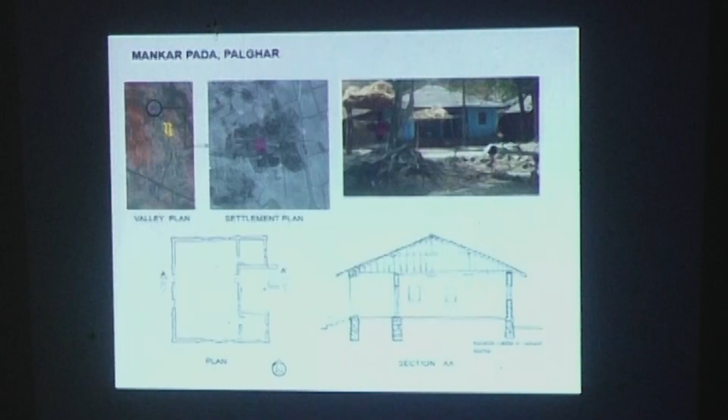This is about buildings in Palghar, northwest of Mumbai, Maharashtra, and this is a tribal area, and the building is reflecting a tribal planning template, also in the materials and the techniques.

This is a farmhouse. Started off as a weekend home, then became a full-fledged commercial property, and is very successful at that right now. This is southeast of Maharashtra, up on the Sahyadri range.

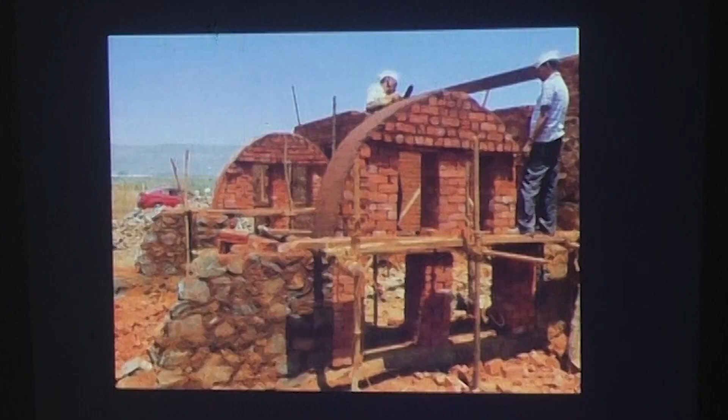And these are some methods, some techniques we use, which I will speak about later.

This shows my engagement with students at this same site, same previous site, at this location.

This shows that one of the things which I do is get students to work on sites on real projects, for them to be able to understand the field better and to consider designing with more practical concerns.

These are some workshops done with students. Speaking about this, all these visuals are about the arch.

This is back to the project, the same project, and another one in Karjat nearby. I'm sorry, I'm so sorry. So,

Yes, since they are a type, this is again a weekend home, so I was rushing through it. This is a house in Karjat. You can see some difference in the typology, at least technologically, where this does not really carry the Laurie Baker template of construction techniques.

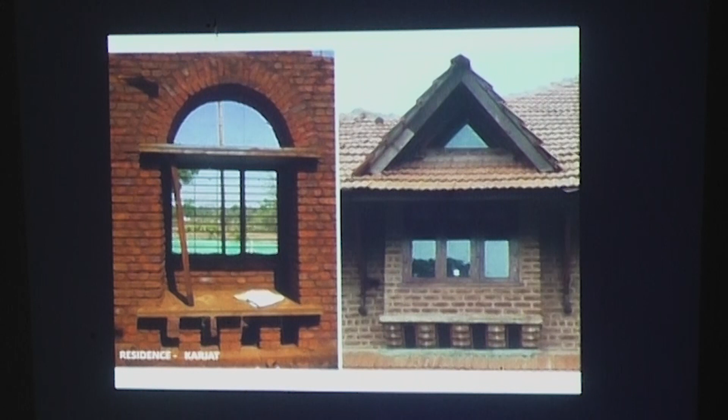That's why you can see it exposed, and you will see it's all in mud mortar. The whole building, the last three buildings, are completely done without any cement or steel in the superstructure.

This is another house in Khopoli, and the same template: farmhouse, no cement, no steel, using local techniques and materials, of course having their own slight variations based on the users.

And here's another type. Once again, coming to farmers, so you have seen a range between farmhouses and farmers' houses, right? There's a community house of farmers.

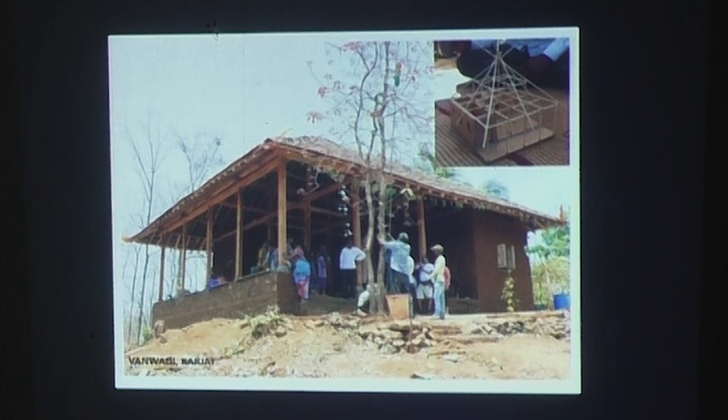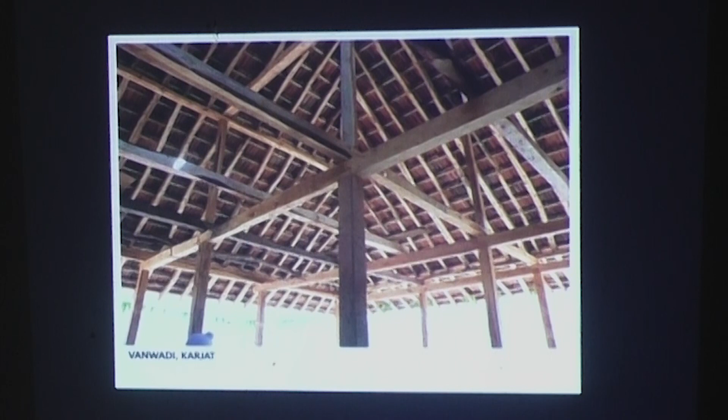It was done collaboratively, where people from various parts of the world had also come to learn the techniques while it was being built, and contributing to it. And then there were a lot of experiments, but systemically, it was taken from the immediate tribal template of planning and technique.

Now I will speak of how we do what we do, and why.

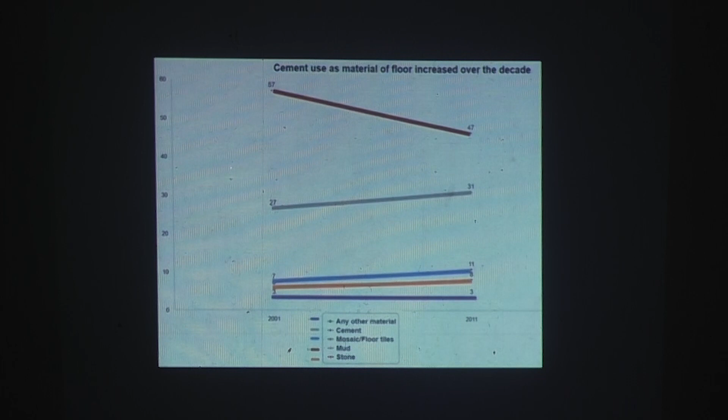This is a statistic for floor materials, how they have performed over 10 years, or how they are being used. You can clearly see that mud goes down, and cement goes up. Your mosaic floors go up. Even if only slightly, stone goes up. We will talk about what these mean in terms of ecology, embodied energy, etc. These are graphs to contextualize the discussion.

Look at this, the major component is burnt bricks. Even today, with all this madness about development and technology, we still have a big percentage building in mud or mud unburnt bricks. These two show a very interesting jump. How does this jump happen, and why does it happen? These are questions which bother me.

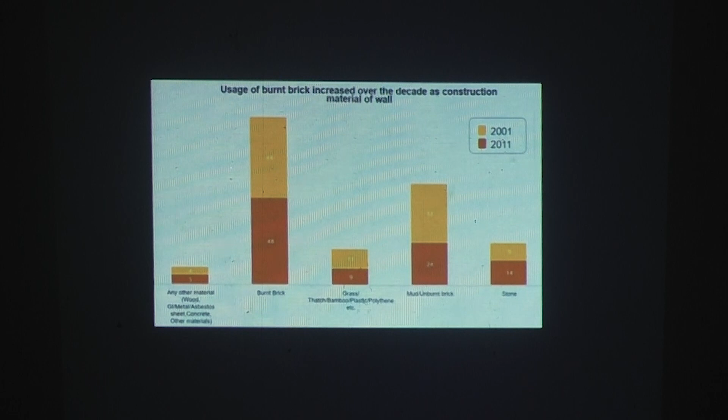Because when you're quarrying, you're turning the biological succession upside down. It has taken millions of years to form that rock, but a few thousand years for lichen to work on it and create some kind of soil, on which it's taken a few hundred years to form herbaceous growth, then some small flora, and then trees coming out of it. You're turning the entire biological succession on its head, and this process is only increasing. Leave apart what you don't know what to do with those quarries, and there are all kinds of rumors these days on that.

After presenting this data and analysis on the way things have been used in India, I would now like to present the way an attempt at negotiating these traditions with high design happened. Here's Hassan Fathy, who all his life tried to enter the realm of vernacular architecture and engage with it. There's an article, and I will back it up with a film of what happened to his attempt at mass housing. Often this question arises: why aren't these techniques used for the masses? Let's use it for the masses. But mass housing may not be the answer to that—we will discuss that. These are experiments, and experiments do fail, but what is important is that we tried.

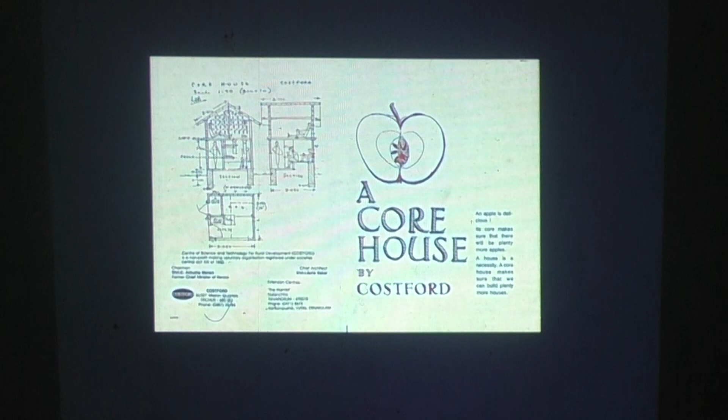So you can see a building. This is going from the vernacular tradition. I would love to design a building like this, but don't have the vision to make something like this - which doesn't look half as pretty, but has the spirit of allowance, the spirit of giving up your signature as a designer, and providing or facilitating people to be able to do their own thing as and when they need.

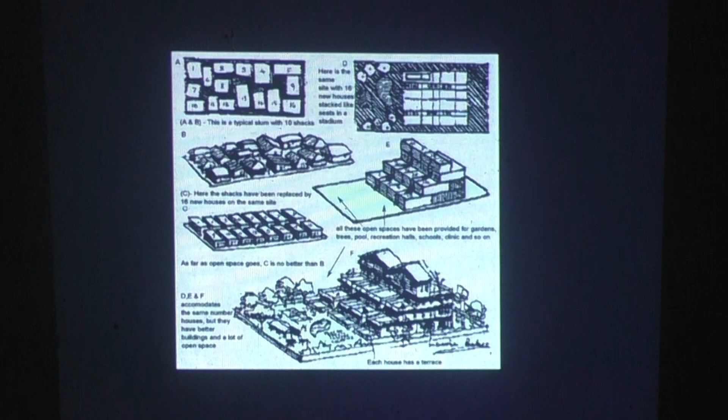And from it comes a technique or a set of techniques. It's an attitude which generates a set of techniques. So my argument was to look at it through...

People's concerns - look at it through what matters to people, and therefore I call it a cultural lens. How does a group of people think? And therefore, what can you do in that matrix, that system of thoughts, to engage with that so that they would not be imposed with something completely alien, or just because as a designer you have limited time, space or resources to be able to understand or work with them.

So my argument is to look at technique through a cultural lens, and here are some kind of rules which Bakerji has suggested to be able to have sustainable practice.

And somewhere or the other, each one of them is putting people at the center - either it is through energy, through non-wastage - it is so that those resources can be saved for people.

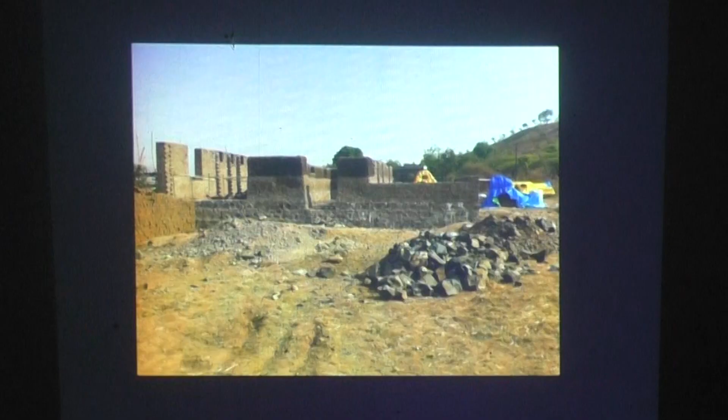It's built entirely in traditional way. These are thick mud walls, 16 feet tall, of the core house here in the center, surrounded by the old house, and then surrounded by verandas which also become rooms.

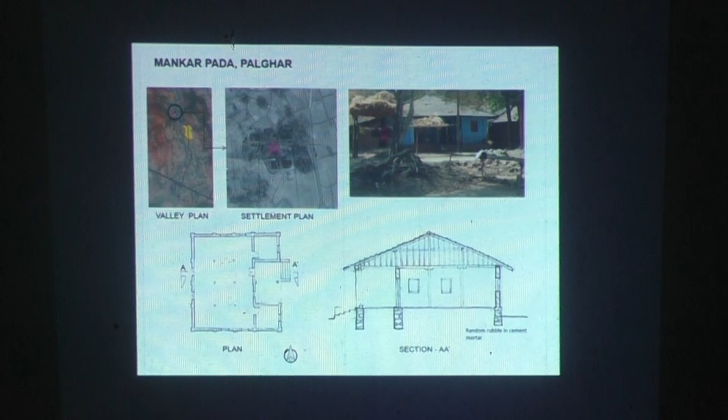This is the context of Palghar, where we're building. This is our standard process where we document buildings in that area, plans, and the client's sensitivity allowed us to use the same planning template. In fact, he insisted on using the same planning template to be able to make a house which would work for him. He was an aspiring farmer and now he's a successful one.

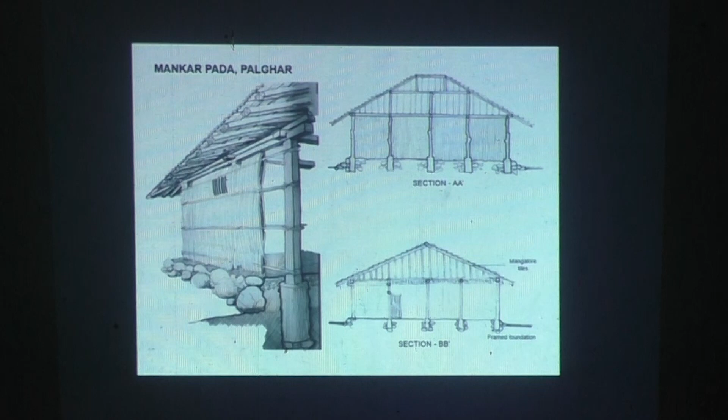This is just to understand the techniques and materials, and that's the house we built. So if you can see, this is the house, and the layout uses the same template, the same grid.

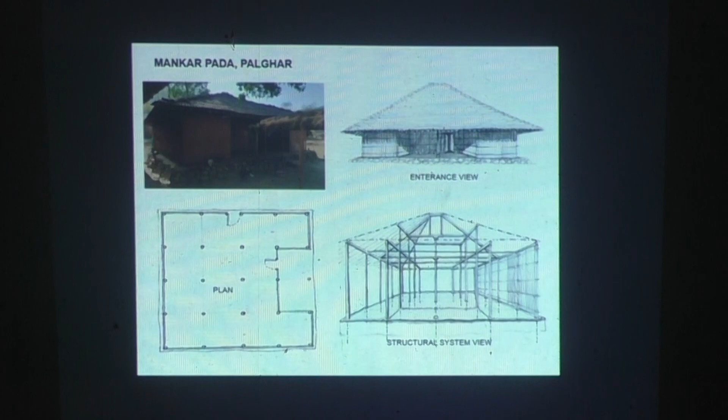But we tweaked it for an urban user who was trying to go rural. It's the same grid, the same kind of columns and wooden pillars, a composite thing, these are all pillars. But we made these into verandas, 1, 2, 3. And this veranda we made into a toilet, and these are all closed rooms.

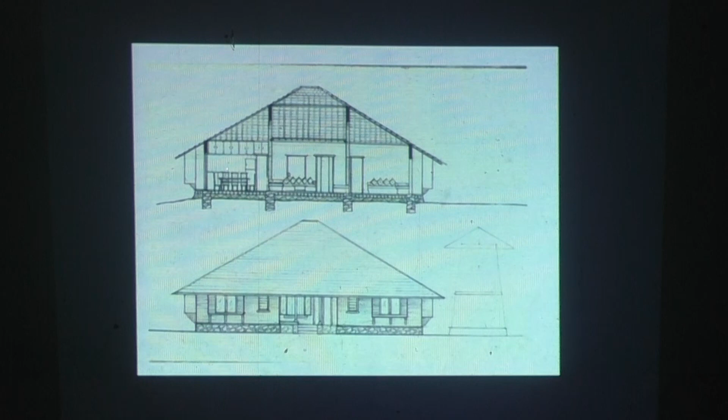Also, what's interesting is we never needed to make computer drawings, and the drawings are only for us. When we were explaining to the workers, this was another big move that happened in practice: what we learned at Baker, we could not apply. It was useless, so we also changed our methods of instruction. We did not have the trained workers which Laurie Baker's team has. Thanks to the whole political machinery which supported the cause of Costford and Laurie, they have a whole team of workers, which still at this current moment does not have local Malayali workers from Kerala. They have migrant workers from Odisha.

So I was not going to go there, I didn't have a choice. I worked with local people because only they could do things which I did not have to teach them. It's an exercise in energy management - I have absolutely reduced my work. The instructions given to these people were just in terms of principles, like leave 4 feet from every corner of the wall to make windows. It reduces my site visits, I have to issue no drawings, and the rest they know.

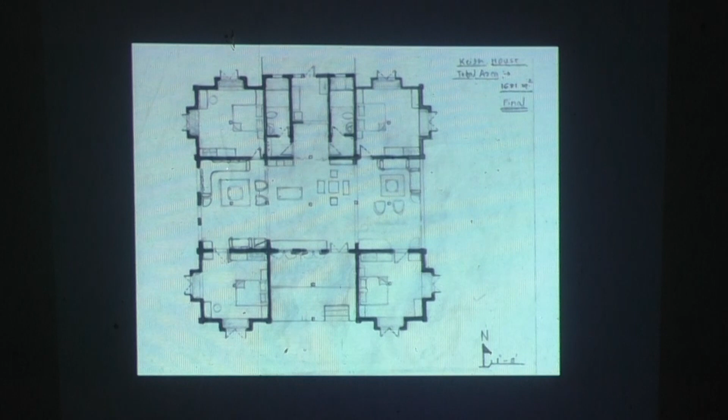I also use these as learning grounds. This project was the first time, because I documented so many timber buildings in the area, I ordered this entire woodwork myself, which generally we hand over to a carpenter. Further than that, I went to the sawmill and got this entire lot cut by myself, knowing every single scantling which goes to waste. For the first time I saw so many trees being used for the house I'm making, which made me question whether using thumb rules for designing this is the only way.

So I got into a structural kind of pursuit into how to design timber roofs, because I had an environmental concern. And the environmental concern indirectly is a cultural concern, because when people lose their resources, that's when they make different choices.

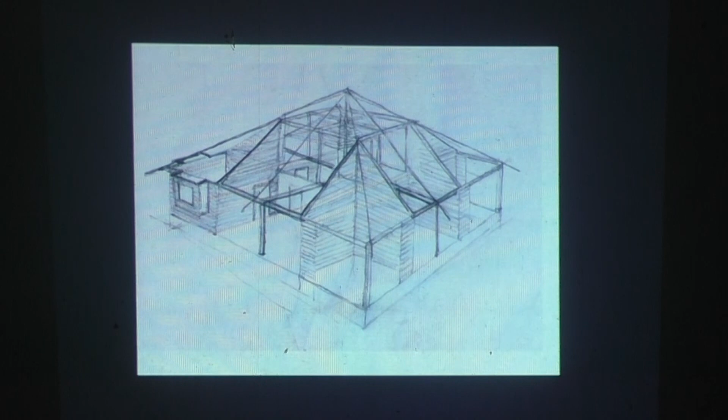This is the house, these are the verandas, this is the central core. I'm sorry, I'll go quick because we are running late and I might disturb your schedules. This is the space, a bedroom where we decided not to make any walls above. Into another house - so learning from these kind of self-funded research programs in my practice, I apply them in further projects. That's another, it's a farmhouse now.

That's a farmhouse, it's gone commercial. It was supposed to be a house, it's gone commercial now, and she's doing very well. No steel, no cement in these houses. So I've managed to get rid of that, but with the approach to technique which is completely based on cultural practices like this. So we documented local houses, spoke to people, and first documented what they knew.

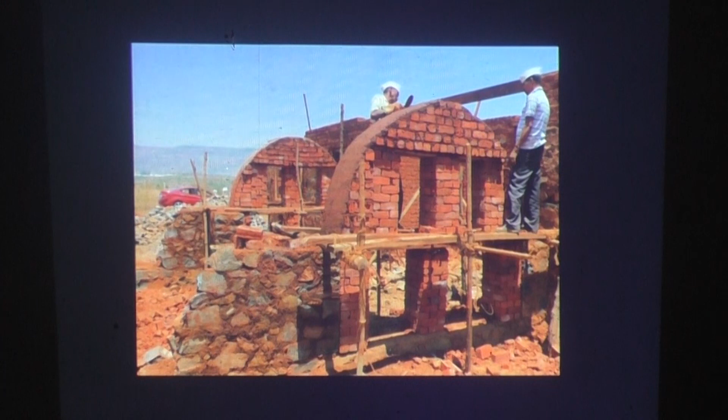So these are - I'll just quickly present - that's wooden floor, wooden roof, etc. The house from the other side. And here's a kind of intervention, doing an arch for the entrance porch - a very symbolic thing which the lady, the owner, had. It was not like what I call a non-core cultural thing, it's supposed to denote something, supposed to tell the people in that area that this is who we are. That arch, that porch, that.

So, using some techniques which do not belong to the region, but with the materials which belong to that region, and with skills which they can use, is what we feel is the way forward.

So they're all completely local masons. There's only one thing exotic in the project, and that's the architect. And this is my team, and these are architects.

Another important point I can stress here is that we took this kind of de-specializing approach. Because if you wanted to move from the high design tradition into the vernacular and the pre-literate, you wanted to be able to access what they know, and they only know by doing. So the architect here can become a mason, a contractor, also a helper, sometimes your political agent in the region. So they would live in that place with the masons in their houses, be with them to create something, make some acclimatization and be able to do this project well.

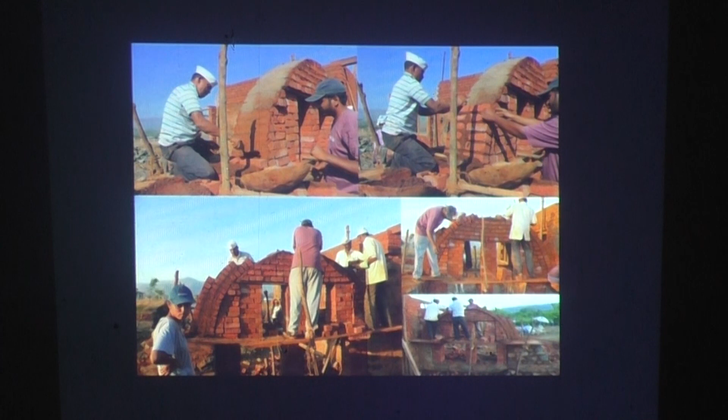And what we also do here is, now that we've moved out of the project, long after we moved out, the client still engages with these people directly. So we also forged some relations here. And we kind of generated a dialogue between the urban kind of person who comes there - it's like an alien insert. But if there is a dialogue, then there is a more potent relationship and future for these kinds of developments. So we take lessons from these also. So one project helps another and kind of guides our methodology.

Here I'm just demonstrating how we involve students in these processes, and I showed this earlier. We take away this whole idea that they're supposed to sit on a chair and design, and then they're not supposed to make their hands dirty. So another important part of technique is being able to do it. If you can't do it, your designing capacity is highly constrained. So we break that kind of mold also.

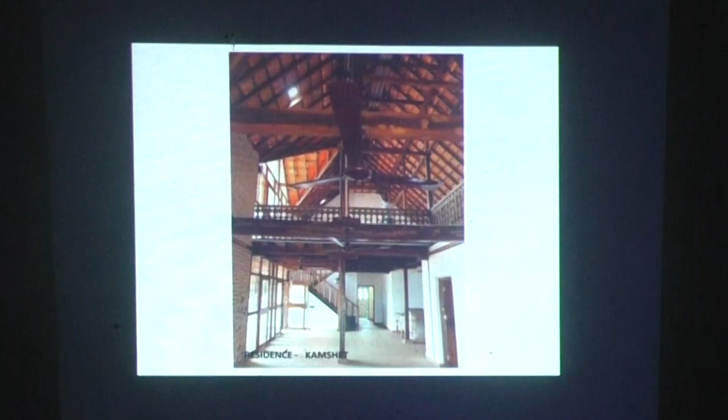This is the same space, and while we were doing it - that's another house in Kamshet. These are all the same type, weekend homes. And this is just about the technical experiments. Entirely, once again, no cement. Cement would be in the tiling, finishing - entirely mud mortar, local, pretty horrible bricks. Worst bricks we could use, but since they are the ones there, we use them. And our logic is if we can do it in mud, then the most horrible brick is good enough.

That's a kind of approach - there's a philosophical standpoint in technical choices. And what is interesting is how we get the clients to agree to this.

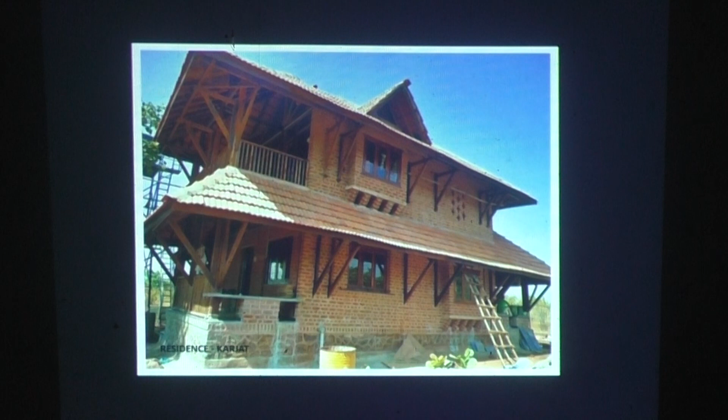So to me, therefore, the technical exploits are not so much to celebrate. Of course, these are arches entirely made in mud, ground plus one kind of building and stuff. We've grown up seeing Laurie Baker's buildings, which are done like this in cement. So we do it in mud. So it was like these are exploits - timber floors, timber roofs.

Extremely thermally efficient - people believe they've entered an air-conditioned building unless they're told it is not.

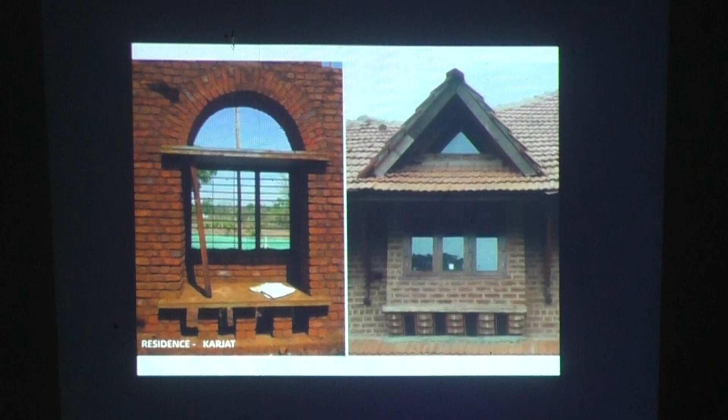The building, just to show you, it's in mud. Another building of the same type, really. But it's the same type, so it will just demonstrate similar kinds of things. The technical experiments, the larger achievements of technical experiments are what I already shared with you. These are just the demonstrations.

Now here's another case of a farmer's house built with the community, but again using the same planning template which they already know. In this case, I have not even made a drawing - all I made was this model with them out of cardboard and twigs. And we just guided them with the foundation center lines because they were a bit unruly with that, but that was not necessary. This building was done in two months, and we had hardly three visits.

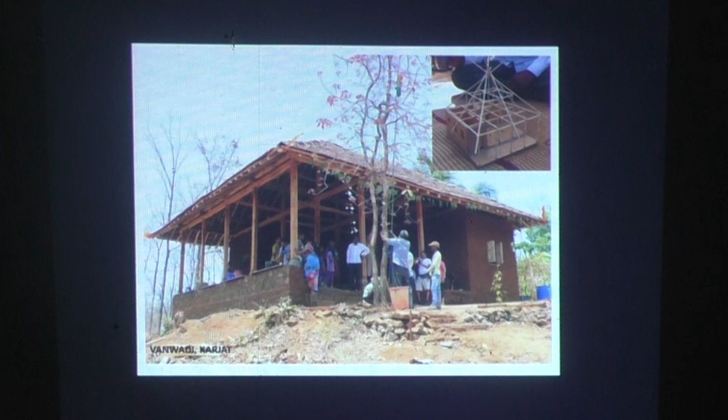Just to tell you, so this explains how technique can be generated without much ado. So these wooden members - they were just given a scale to measure, and the trees behind were measured and cut, and the house was built with that. Within a month, the entire timber work was done. Completely local labour - the family who lived there got extended family to build the house very quickly.

Of course, the ones who benefited were architects and the like from all over the world. Learn this because it is so special to them. The idea for us is to decentralize, to kind of just learn from them and to just facilitate rather than impose, and technique just falls in place.

Technique is a part of a whole system of things to me. Of course, with the knowledge we acquire as technical experts, we tweak these a bit for slight modifications. We do that, but it's not the larger problem. That's a very small part of the problem.

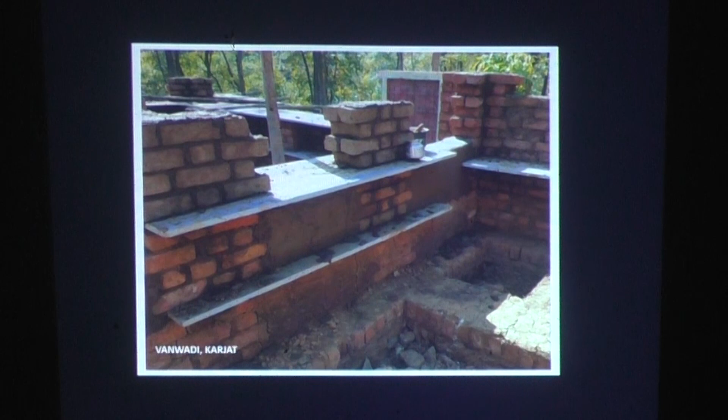So that's an example, a mud wall, 9 inches. Even we have not heard of it before, but we strengthen it using that previous kind of technique. So that's mud only on top.

So we have these brick piers at regular intervals, but we tie it all together with stone slabs so that there are shelves from inside the house and the building gets stronger. But you have to do it when you are building the building. Now that's a structural issue.

And it's just kind of working out a jugaad with what you have. I mean, putting together, first of all, really taking seriously what you have at your disposal. So this mud is from the site.

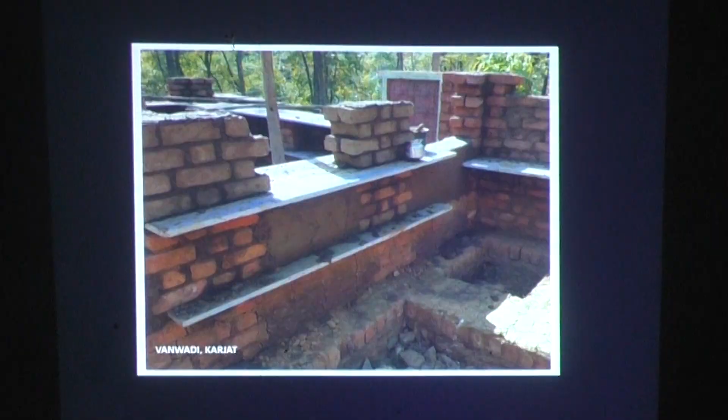And the model was given only for the main frame. Everything else they knew, and that was also not necessary. Actually, this was just kind of reinforcing their own belief in the systems which they already know. And we just kind of interjected and left.

Reducing costs, and therefore also making this kind of practice affordable. I mean, here's an example of housing for the masses, by the masses. There are problems of a different scale, but I really seriously question what are the factors which create those scales of problems and therefore the need for such scales of housing.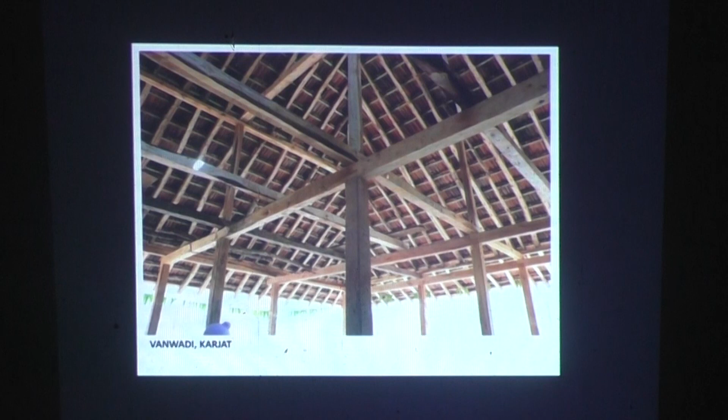I wouldn't want to be like an end user who's only supposed to solve problems which other people create. I would question why they create that problem, and work in an area where they are creating other problems. That's the larger section of it in my head. That's celebrating after it is done.